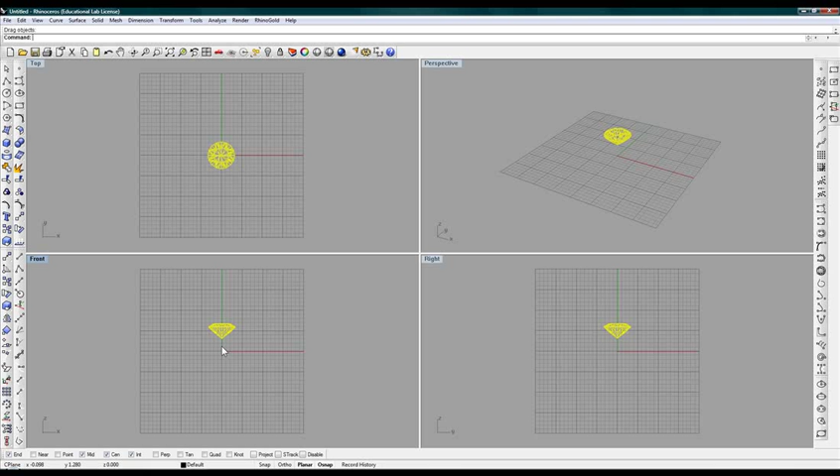The next thing I want to do is designate what we're going to use for the upper gallery wire here. So the first thing we're going to do is go get a circle over here. I'm going to start it on F4, and F4 is 0, 0, 0, and you can designate it as a hotkey in the Rhino options. So I'm going to bring it in here. Now, if you have your snaps on, these get in the way, so if you hold the Alt key down, just a little trick there you can use.

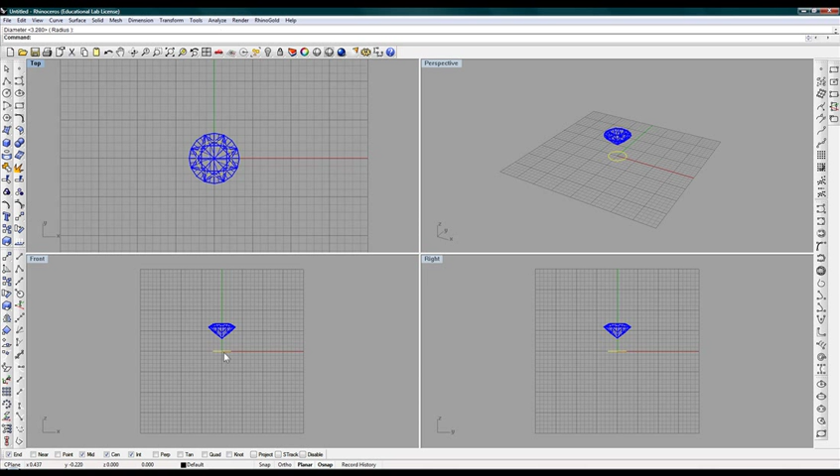And I'm going to bring it in till it's approximately about 4.5 millimeters in diameter. If I wanted to get it exact, I'd just type it in 4.5 and hit enter. And I'll left click there and drop it. Now you can see it's down below here, so what I'm going to do is get a little bit bigger here and double click on the front viewport so you can see it a little bit better.

I'm going to shift ortho on. I'm going to bring it up here a little bit, and I know this is going to be about a 1 millimeter wire, and I don't want it to touch the stone necessarily, and I can navigate that in a little bit if I need to.

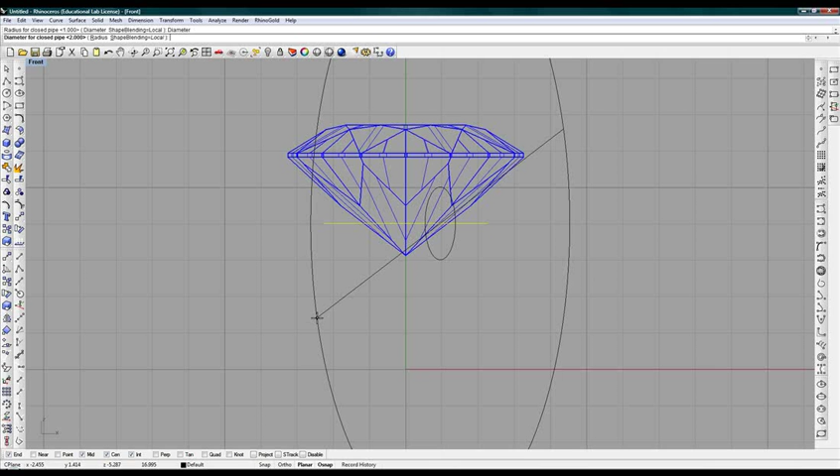Okay, so now that I've done that, I'm going to go ahead and put a pipe around that. That's a solid menu, and you just click on pipe, and it always defaults to radius up here in your command line, so I'm going to choose diameter by left clicking on that. And now that that's the diameter, I'm just going to type in 1, hit enter, and enter again. And it's going to give you this upper gallery wire. And I'll shade that so you can see a little bit better.

I also can use the arrow keys here just to show you that we're not touching the pavilion of the stone, which is fine. You can adjust that at any time if you want to.

Okay, the next thing I'm going to do is try to designate where I'm going to put a prong. Now remember, we're drawing this right on the C-plane. So I am going to just go get a single line over here, and I'm going to turn my snap on, and every time you turn on your snap, it snaps to 1 grid increment set by Rhinoceros as default. So I'm just going to go over here to 1 millimeter increments, and I'm going to left click there to start my line, and then I'm going to come up here and go to just above, about even with the table.

Now because I still have my snaps on, I have to turn them off because it's taking my line, so I will go ahead and toggle that off. Now I got pretty much command of it. Now I want to bring it right about past the girdle, and I want to be just above, about even with the table there. Okay, and I'll left click there.

Alright, now the next thing you can do is go ahead and put a pipe around this. And I'm going to go ahead and do that right now and go to solid menu and another pipe. And you'll notice that the stone is about 6.5 millimeters in diameter. In other words, about a 1 carat stone.

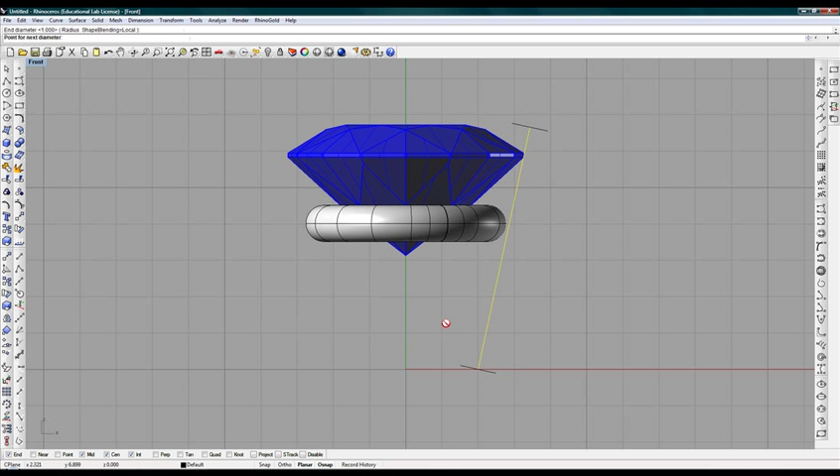So I'm going to put a 1 millimeter prong on this. And we're already designated as 1 millimeter between the 2 angle brackets. Okay, so I'm going to go ahead and hit enter and enter again, and then enter one more time, and it's going to give you that prong. Now I know that looks huge on the board here, but really isn't all that big. Alright, so now we've got one of them here.

To get 4 of them, I'm going to go ahead and get out of the front viewport, and I'll get in the top viewport here so you can see a little bit better.

Alright, I'm going to go ahead and choose this prong, and I'm going to the transform menu, and we'll go in and do an array polar, and that means we're going to take it around the center point of this stone, which is going to be F4. So it says select objects to array. I'll pick the prong, hit enter, and the center of the polar array is going to be F4.

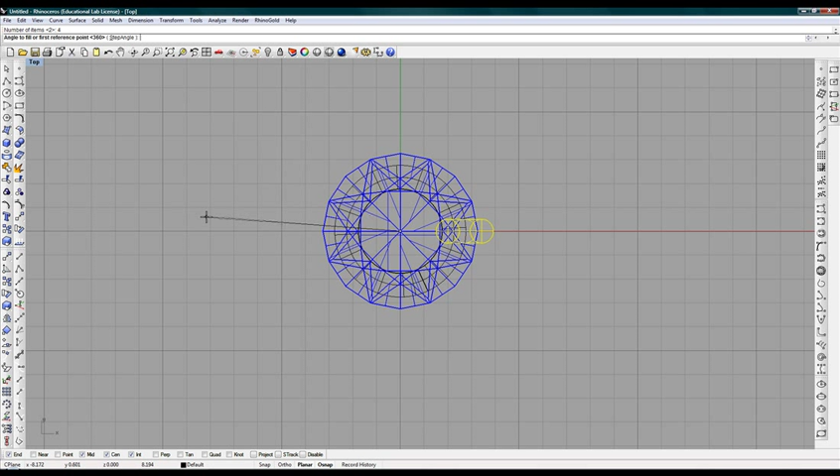And the number of items up there I'm going to change to 4. So if you wanted 6 prongs around this, you would type in 6 and hit enter. But I'm just going to type in 4, hit enter, and hit enter again because it already has given us 360 degrees, which is a full circle. So 360 degrees is where I want to go. So it's going to put 4 of them around that angle. And I'll hit enter there. And then you've got your 4 prongs.

Okay, and there they are, and we'll get out and look at it in perspective now just so you can kind of see it a little bit better over here.

Alright, so all we have to do now is put another wire down at the bottom to connect the bottom parts of the prongs, and then Boolean union it all together to make one piece.

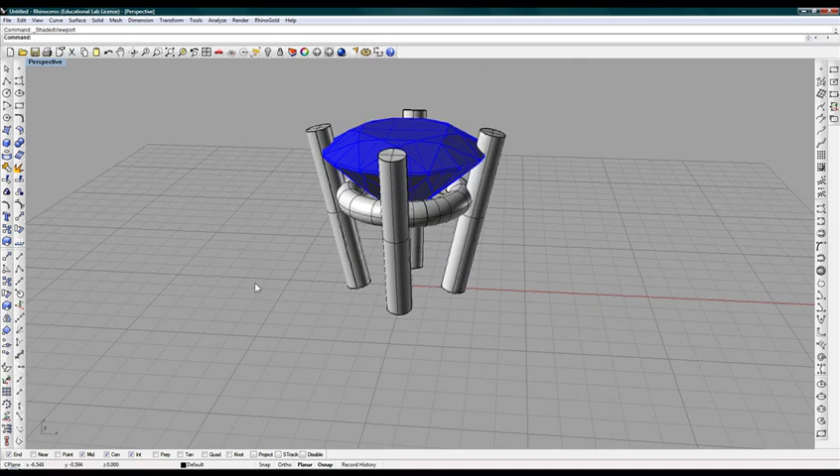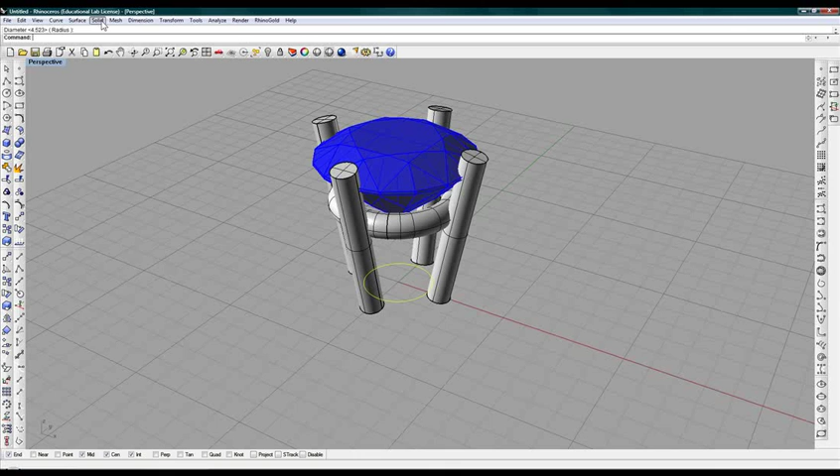Now you can change this if you need to, it's up to you. We'll take that now and put another pipe around it, and that's how simple this is. You have to look at this and decide whether you want that 1 millimeter. I'm going to make it a little bit bigger, I'll make it 1.1 and hit enter.

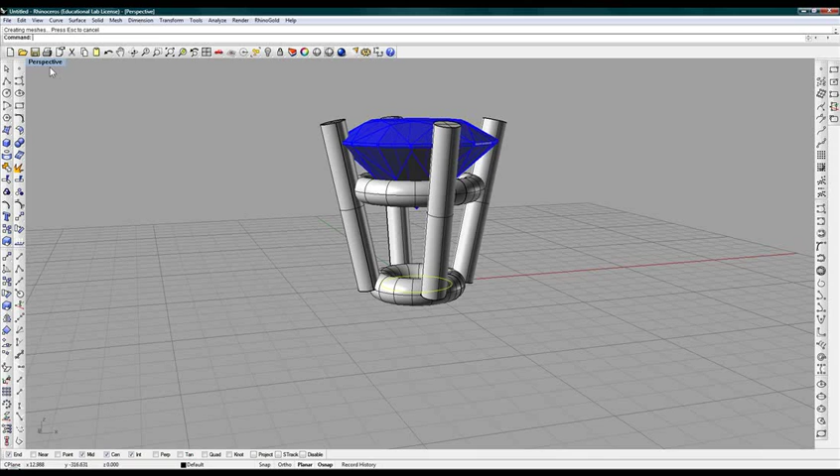That's going to give us a little bit more of the base here. Now we're a little bit below, no problem. I'll get out of perspective, bring it down here, zoom in a little bit, and do a backwards dotted box around this, which means crossing - anything I touch gets selected. I'll turn shift ortho on and bring it up just a little bit so it matches the bottom here better.

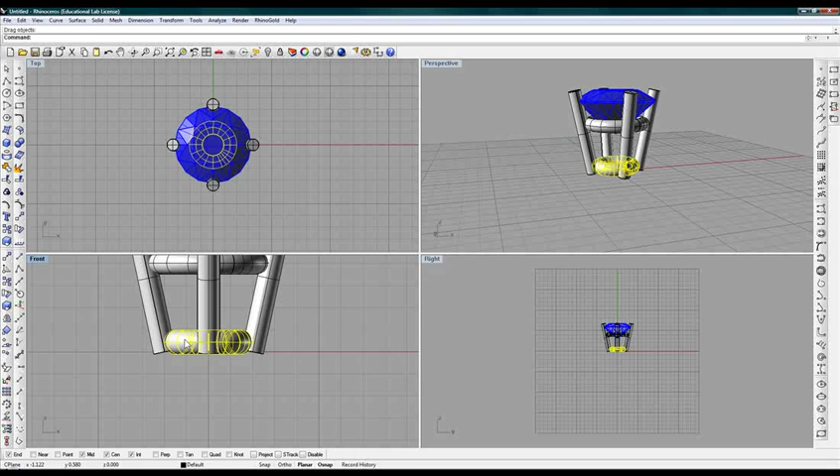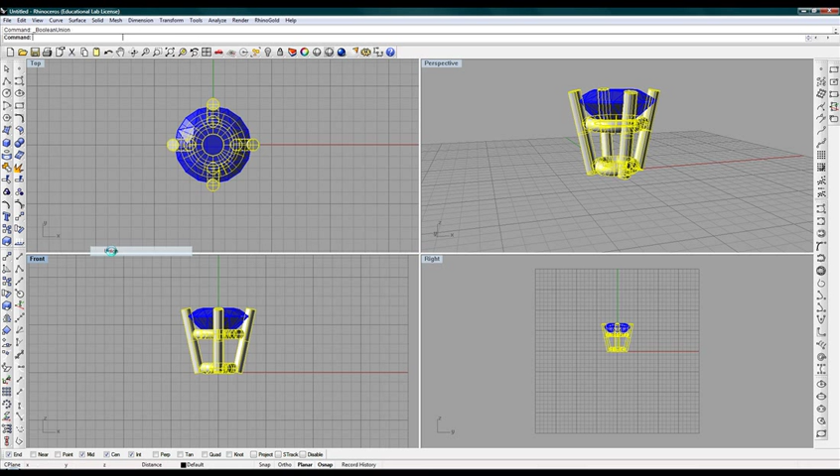Now that we've got all that done, I'm going to window everything here - it doesn't make any difference which viewport you do it in, I'll use the front. Then I'll hold the control key down on the keyboard and left click on the stone to deselect that, then go to the solid menu and union the piece. It'll take just a second, and they're all put together, which you can tell just by clicking on it, or you could go to the analyze menu up here and check it out to make sure you've got a good piece.

Now the reason why we put this in here - so this prong came in there - is so that the jeweler can properly cut a seat and set this stone. If my prong is too far out, then I'm not going to be able to set the stone properly. I'd be cutting the seat, and then I'd have to bend this prong way over to meet the stone, and it won't sit in the seat properly.

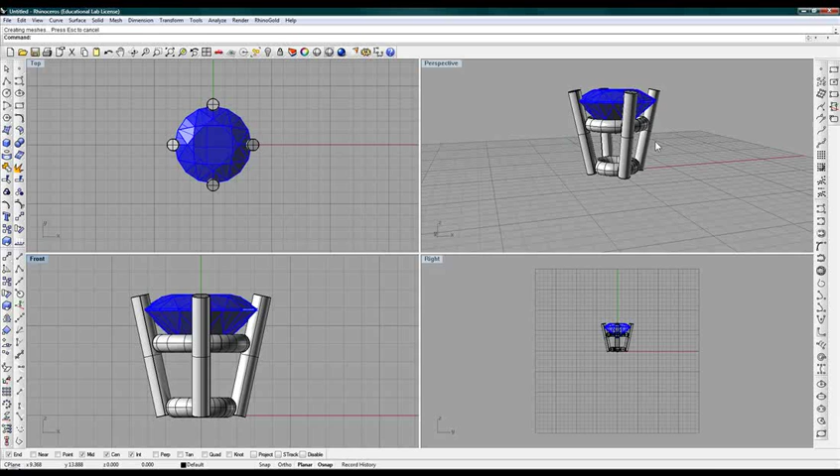Alright, so the next thing I'm going to do is fillet the top edges of these prongs. I'm going to go to the solid menu, fillet edge, fillet edge. Before I choose the edges I want to fillet, I know my prongs are 1 millimeter in diameter, therefore a radius of 1 millimeter would be 2 millimeters in diameter - this thing would never work. So you've got to change that to less than half of the diameter of the prong, so I'm just going to type in 0.45 and hit enter.

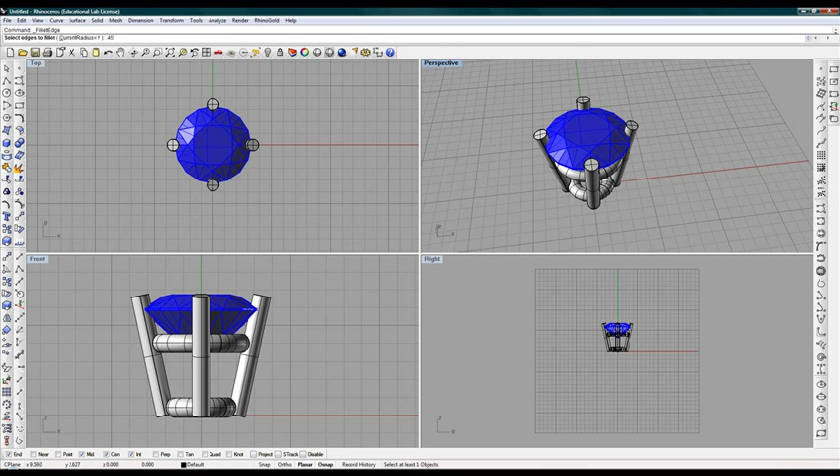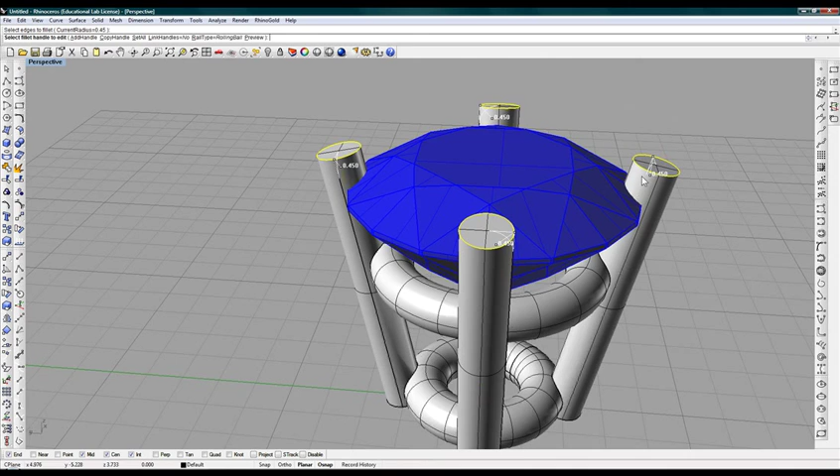I'm going to get large here by double clicking on that viewport. I'm going to choose each one of these and pull it over to the side so I don't choose something inadvertently. You'll notice each one of them lights up at 0.45. I'll go ahead and hit enter, and now it's going to show you how much it's going to fillet here. All you have to do is hit enter again, and it's going to round off all of these prongs because I chose each one of those edges, and it does them all at the same time. Still one piece, everything is fine, ready to go.

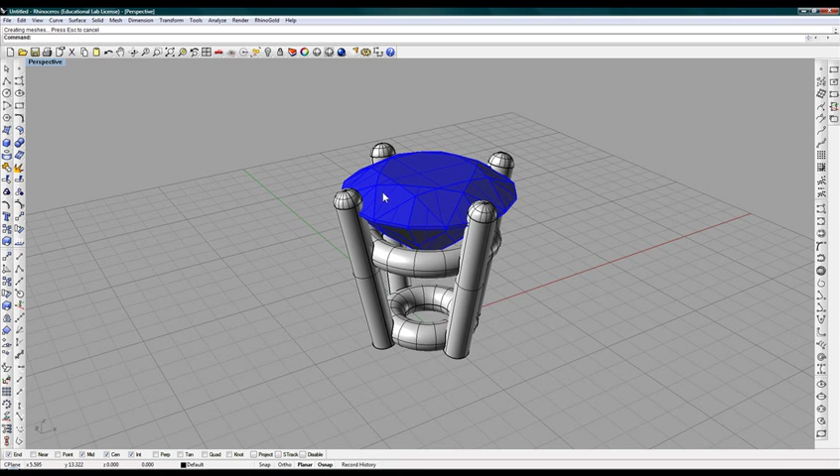Now you would save this head only if you were going to mill it or grow it. You don't need to save the stone, that's going to be just fine. And I do not suggest cutting the seats in the prongs - let the jeweler do that for the most part, I think, in this case. Okay, that's it, and that's all you've got to do to make a 4-prong gallery head.